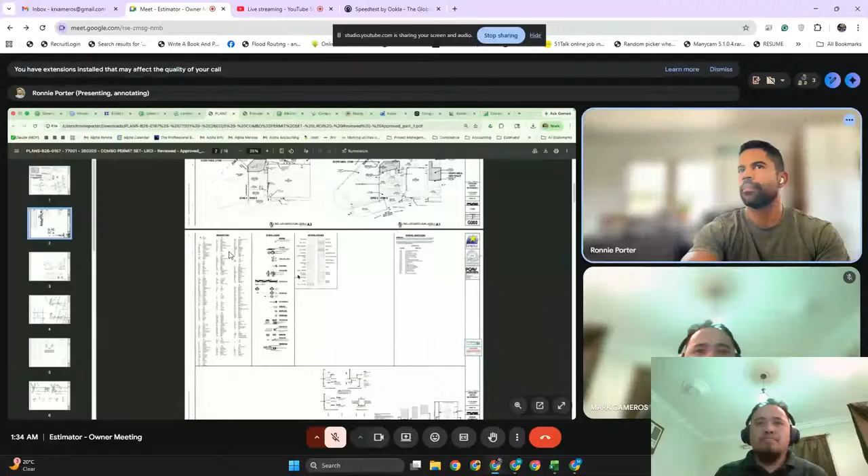Let me enter full screen here. Well, I haven't had this issue before. Something's going on where I can't see the plans. But obviously, wherever you downloaded it, like where did we download it? Right here. We can just open it up on a PDF viewer and see what the plans are. I just want to get a little familiar with it. Okay. So you'll want to review the plans.

And how do you feel about looking at plans and your understanding of what plans look like? I'm good with it. Yeah. Actually, you feel confident in it? Like, I've been dealing with those mostly my entire career. Been reading and then implementing them on site, and doing the estimates just to make sure we would not do some overruns for the project cost.

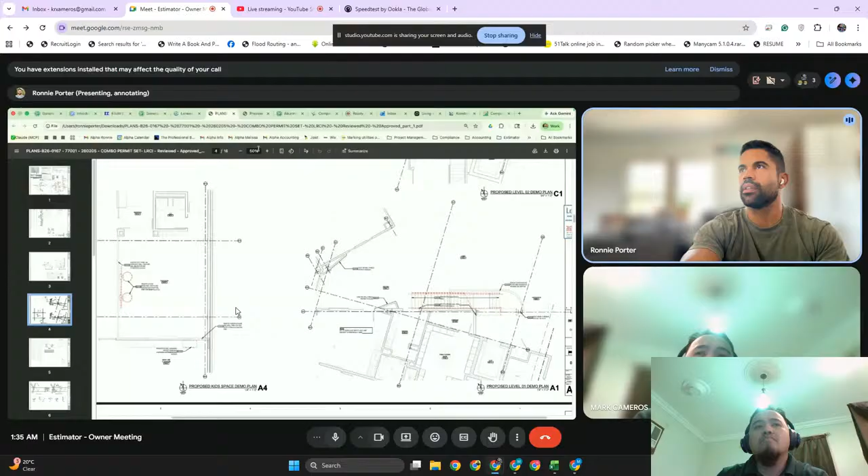Okay. Well, good. Because as I'm looking at it, it looks like there's stairs here. It looks like everything in red, which I can't read this stuff. It would take some time, right? Can you send that on my email so that I could download it and let's try to look at it together? I think mine would be better. Sure. Okay.

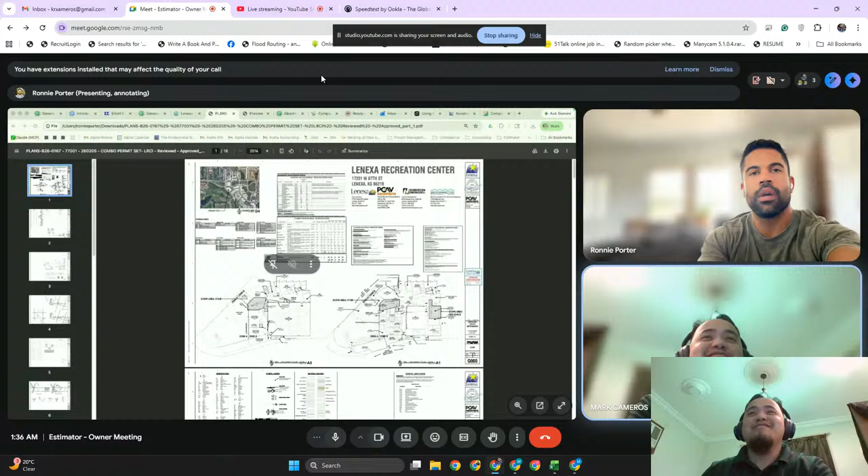Estimator. There we go. Next. I'll just send you everything. Yeah. Okay. Still haven't got the invite for Construct IQ. The invite for what? Oh, for Construct IQ. Okay. Hold on. Maybe you can just log in to the website. Yeah. Can you send it over in chat? Yeah. Because the

How many screens have you got? I've got one for now because I still haven't set it up. I do have three monitors. Two. I bought one in Temu. Actually, I still didn't set up this stuff. Yeah. Sure. Nice. I was just kind of expecting an onboarding estimator.

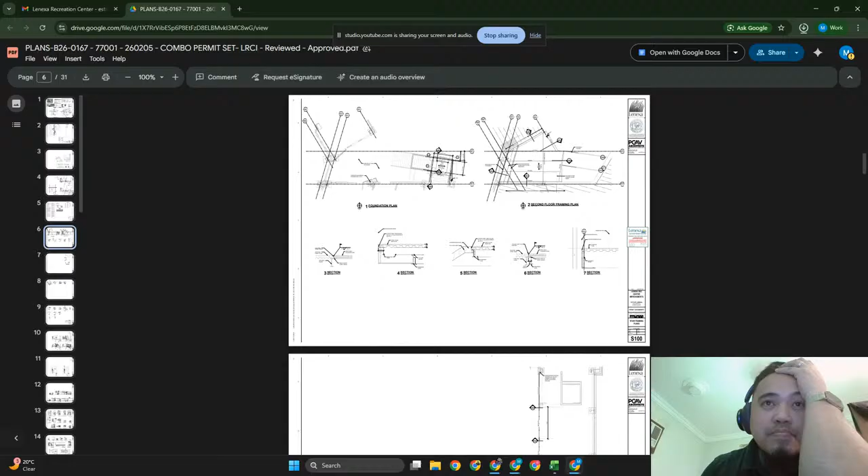So if you see my screen, is it right here? Do you have this option? Yeah, I did. Okay, so you did that. Well, let me see if I set you up the right way. Looks right. Oh, nope, I didn't do it. Your estimate's not estimator. That's the problem. Voila. Already exists. Oh no. Might have to reach out to him. Or maybe can you delete your account real quick with Construct IQ? Did it create you a new account? What does it say now? Well, it's saying that when I try to add estimates at Alpha Construction KC, the user with this email already exists.

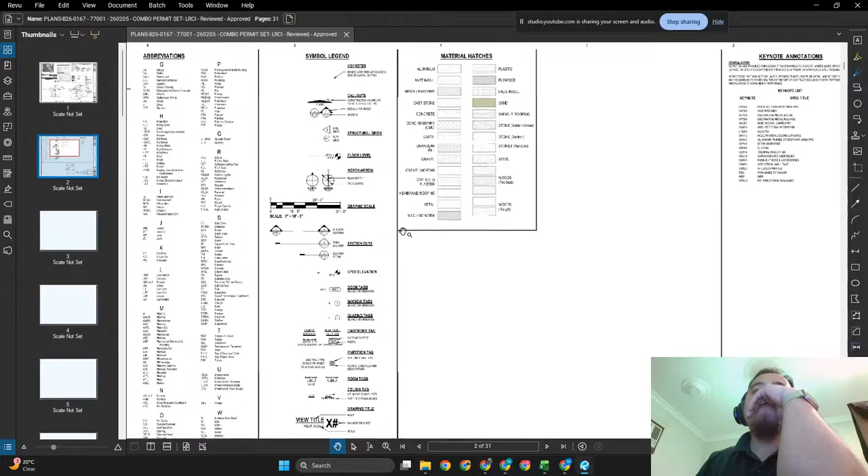The thing is, I cannot proceed with anything at all. Because it's asking me to. Hmm. This is strange. Let me delete and then I will recreate one. I don't think that's the issue. It would still be the same because the name is already registered. So perhaps we should call support. Yeah, you got it. Okay. All right. I'll work on that during our break. But let's go back to this.

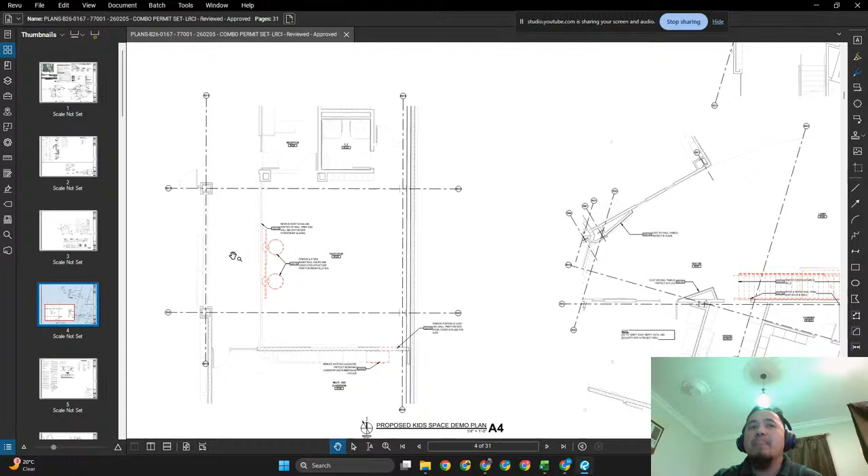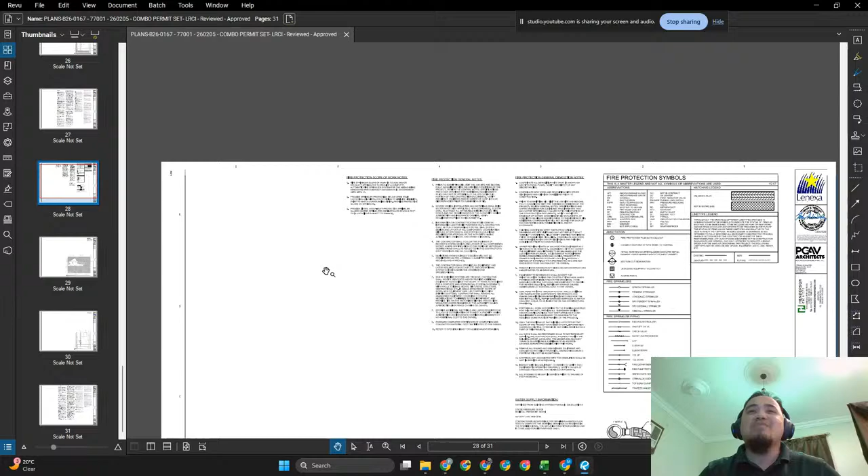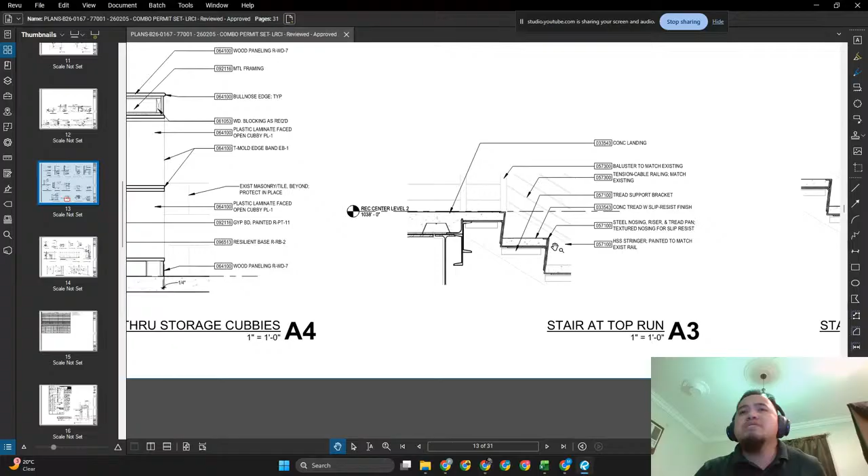It's kind of odd because the stairs is not literally concrete. No, they're metal stairs that you fill with concrete. Yeah. So that stair is a different one. Yeah, but for the foundation, let me check with the plans.

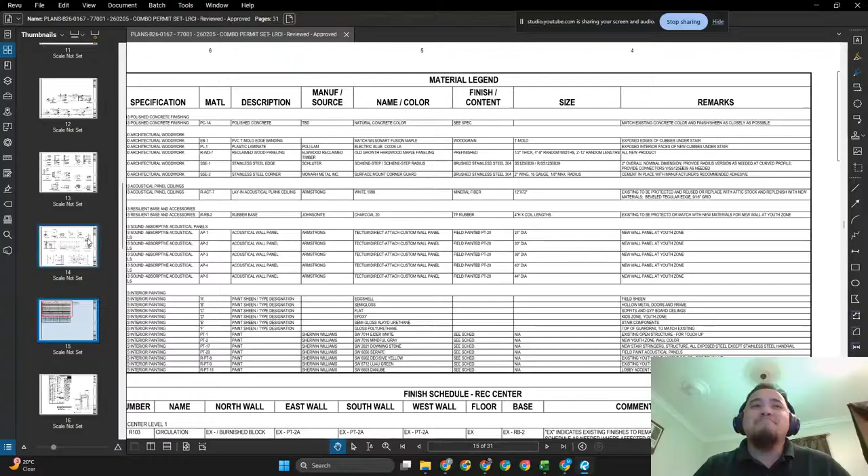Yeah, it's also right that it does not have any vapor barrier. So, amazing. Yeah, so plans are often not filled with all of the right stuff, so we would just have to put in assumptions. So there's an interior slab on grade on page 5, but it doesn't say how many square feet. I bet all of that gets the vapor barrier.

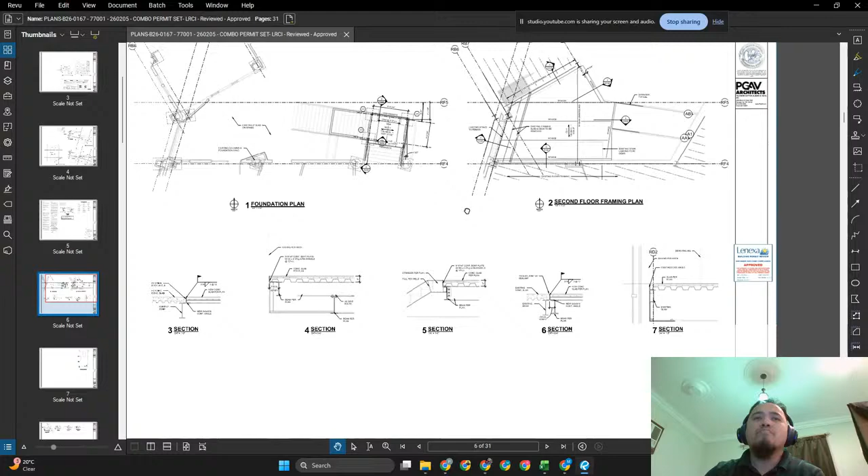Are you seeing the amount of the slab on grade for interior? Interior. Yeah, the interior slab on grade. I guess I can look too. Page 5. That's not page 5.

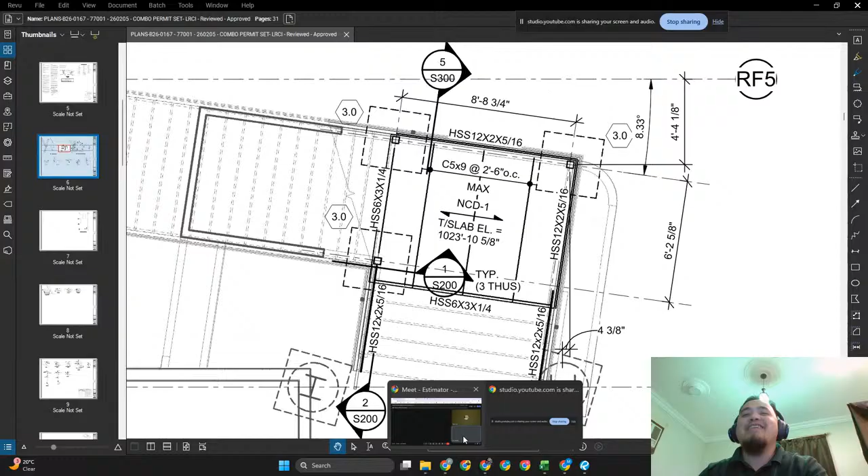Well, the slab that I have for here is the landing. How do you call this part of the stairs? Can I share my screen? The top landing? Yeah, you could. I think you're talking about the landing, right? Yeah, it's this, that one. Okay. And that's only this part, 6.2 and then 8 foot 8 and 3/4 inches wide. So it's not very big, but that looks like a suspended slab.

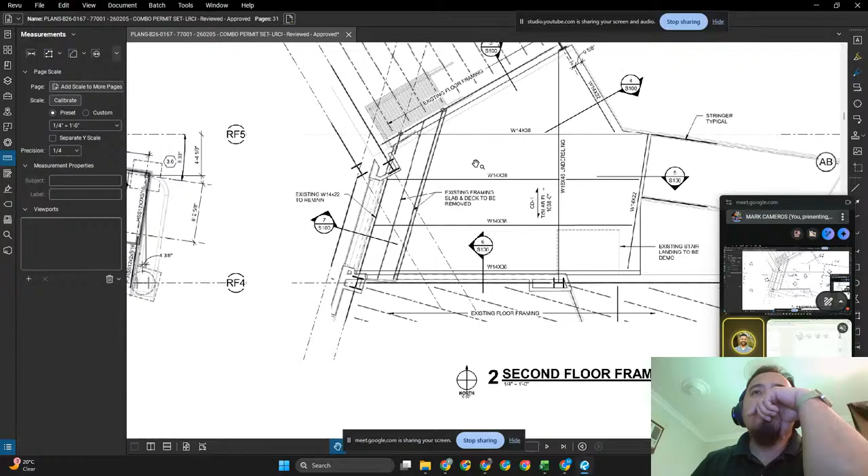You didn't see a slab on grade on the floor, like on the bottom level? Yeah, nothing at all. Well, there has to be, because these details show slab edge, a footing here. So it's gotta be here somewhere.

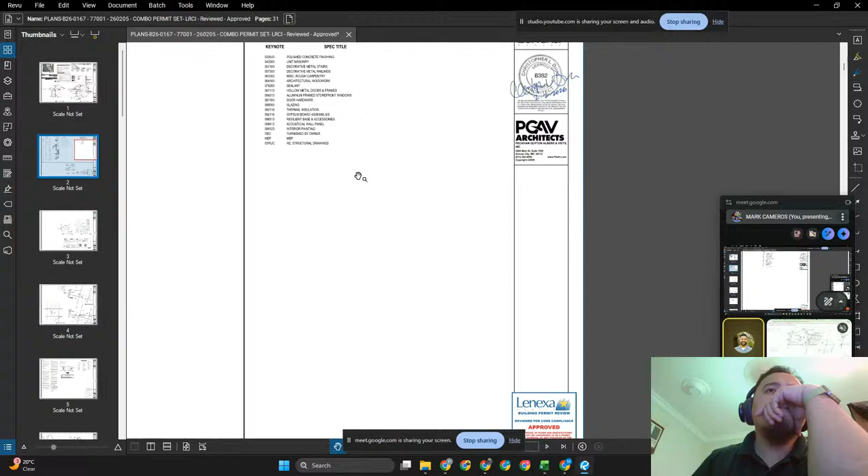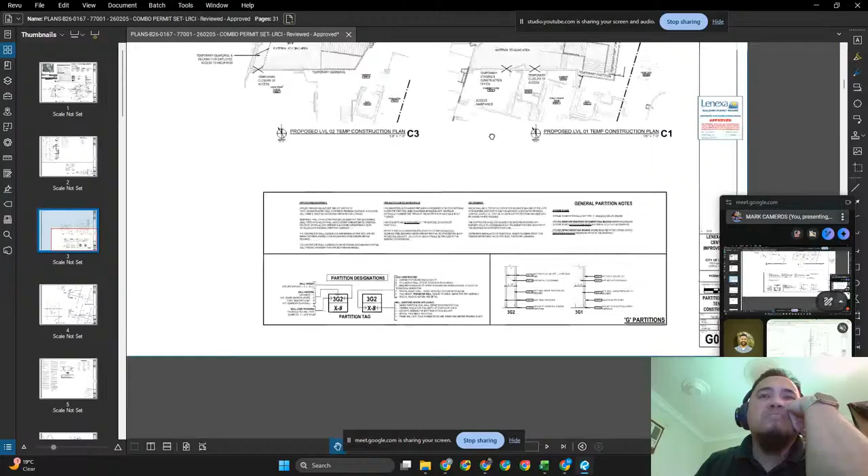Yeah, here's a new upper landing. And then there's the landing for the stairs. All these stairs get concrete. I'm just looking for the bottom floor. It's not so clear. What I basically had to do with this one is to look into the construction book of this. So this is just renovation, this part.

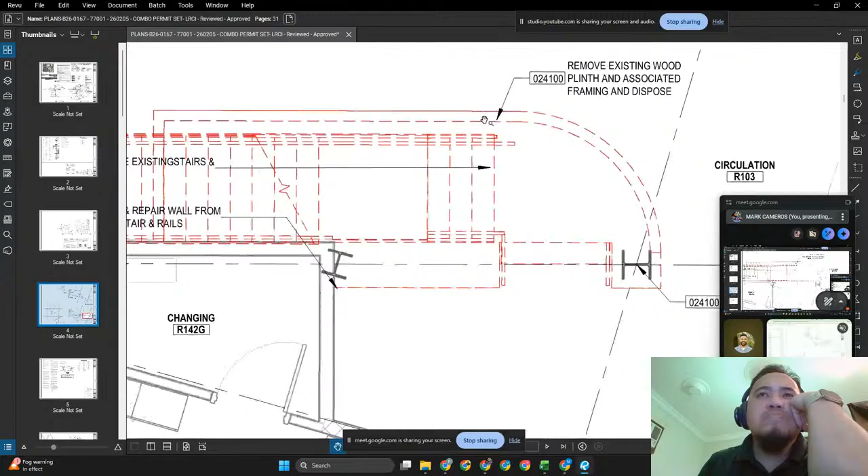Mm-hmm. Partition plan. Temporary construction. This is demo. Blueprint. Okay, it's in two different parts of the building. I see. So it's a fairly basic job, it's just hard to navigate exactly what is where. I can't seem to find the slab on grade layout. Neither am I.

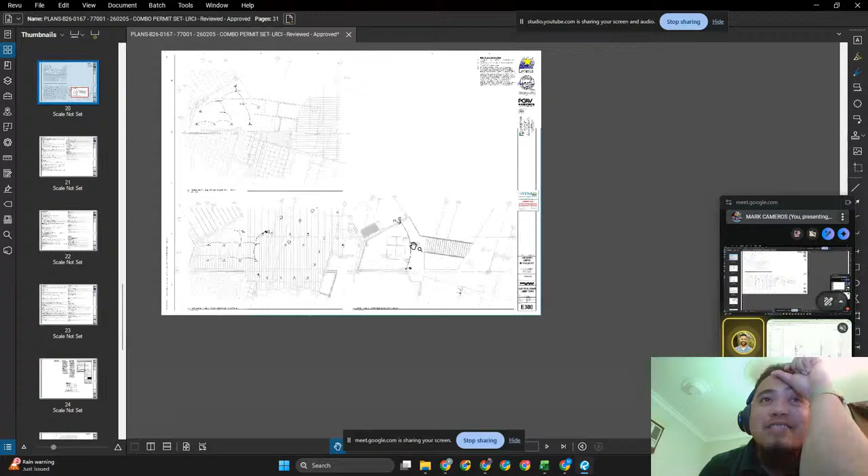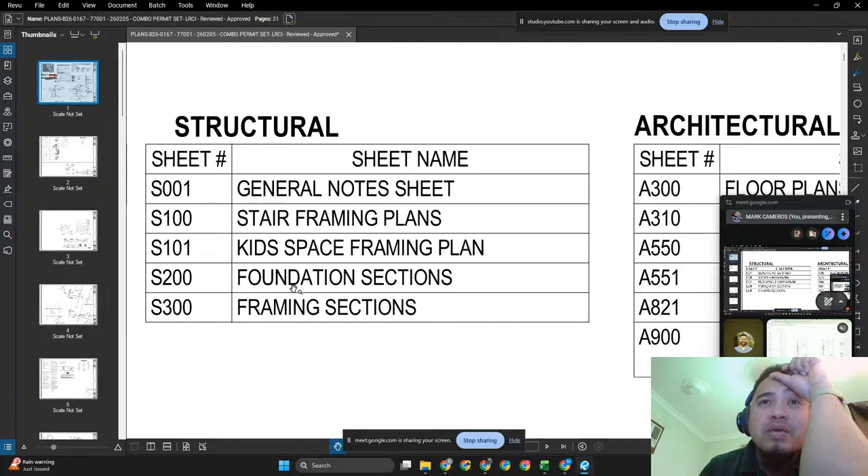I found the stairs and I think I understand the stairs, but in the structural, I don't think there is a sheet just for the slab. So for the structural, you only have general notes, stair framing, kid space framing, foundation sections, and framing sections. Nothing more. I saw framing, but I didn't see the slab on grade. So what would you do?

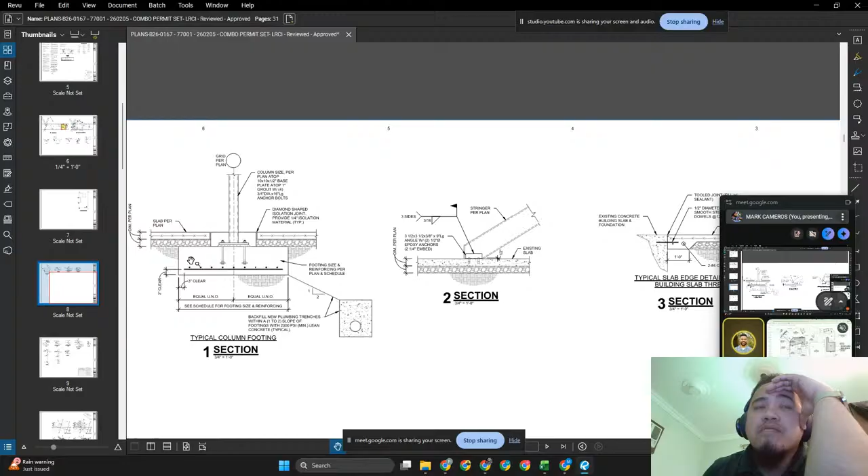I mean, here on the first page, it does give the room, the youth gym exercise, the kids space, as 853 square feet. And it looks to be on the bottom level. And then in the other section is the staircase. So what would you do in a scenario like this where it's not very clear?

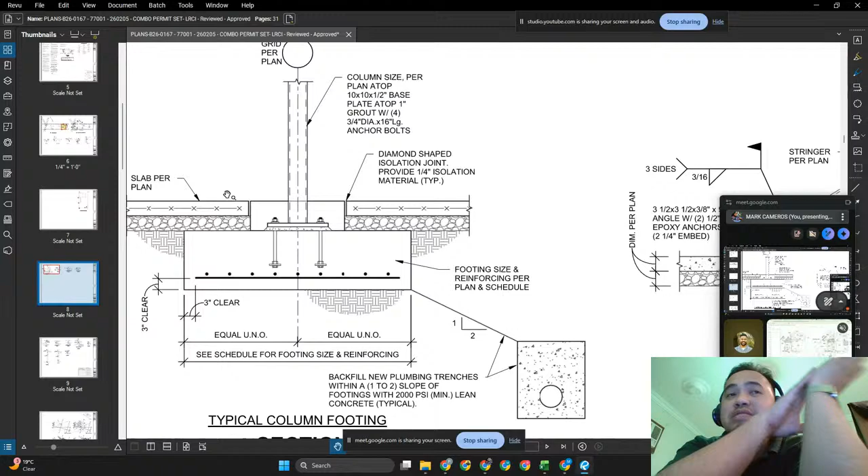I would write an email about this to clarify. If I cannot see it, I basically would have to verify it from you first before I would send an email to the client, because we could not rely 100% on AI, and I have to confirm it from your side if we would go for sending an email, because AI told us that they have these details and we cannot find it. Mm-hmm.

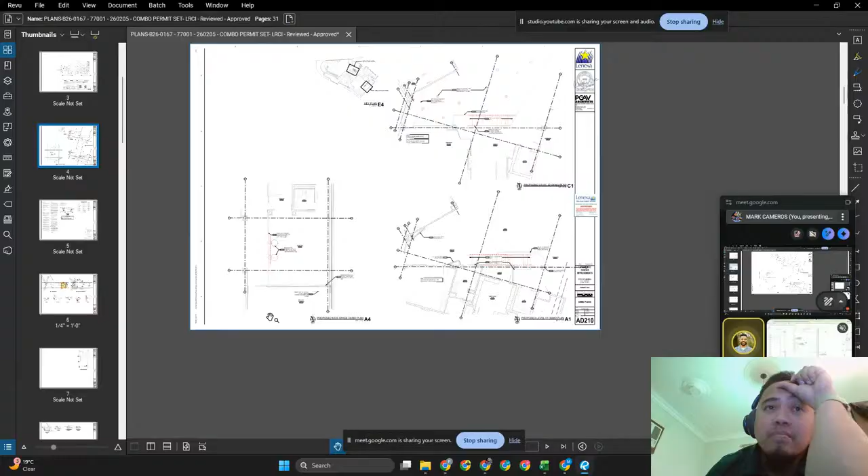In the demo plan, does it show that we're demoing a floor? I didn't look at the demo plan. What page is the demo plan on? Page 4. Okay, it just has it removing stairs. And then in the kids space, it has it removing basketball hoops and a chain link portion of the wall. So it seems to me like there is no slab on grade.

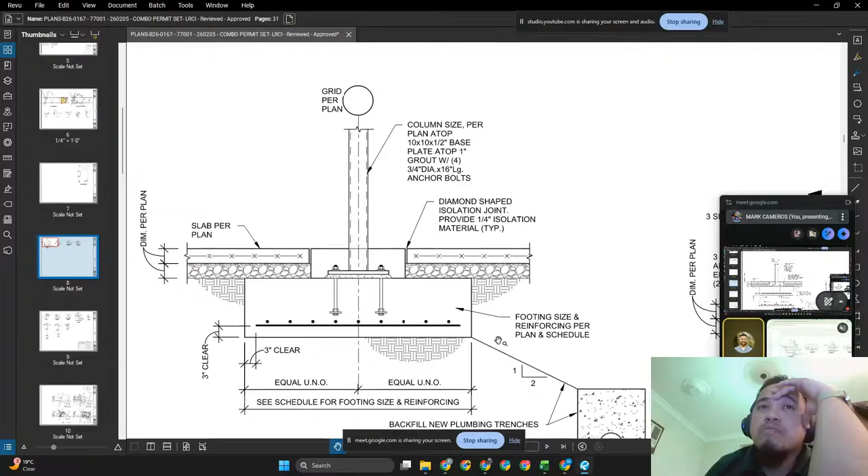But if we look for section eight, what page is this? S200. Here's the detail for the foundation, but it did not mention this. Yes, that's right. I wonder if those column footings are the footings for the new staircase. I bet they are. And then maybe the slab is for the staircase as well. Maybe we demo that area to put in the new footings and a slab, and the kids area doesn't get any new concrete.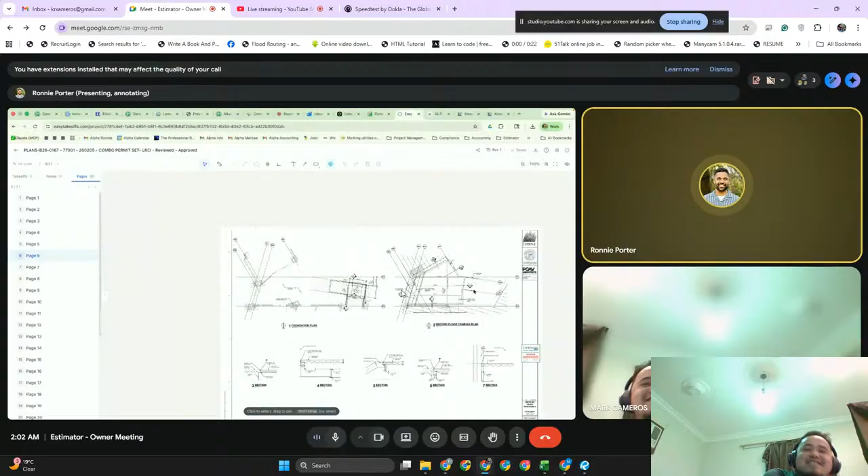This is a difficult one. So yeah, I think your response is right. We would just need to reach out to the GC because it's not clear where the slab is. The only thing that's clear is that we have a landing on the stairs and that we have metal stairs to fill with concrete and 3 footings. But where's the slab?

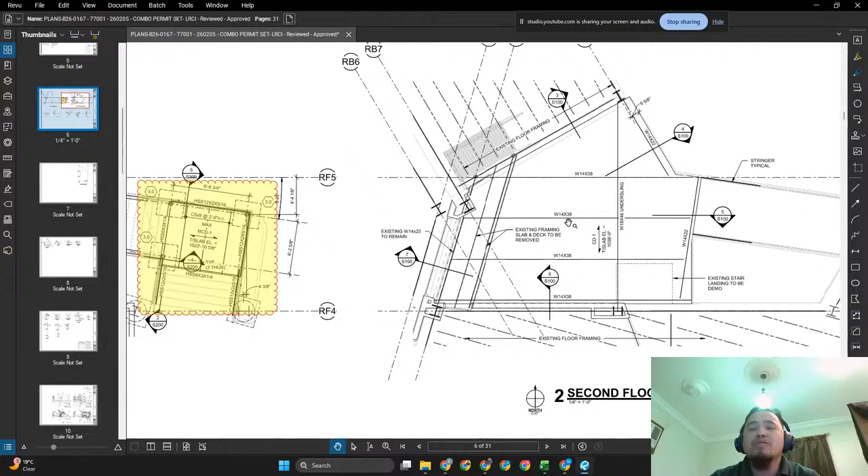So basically one of the responses that they are going to give to us is that the section is just the detail of whenever we are going to connect. But as indicated in the plan, there's literally no section that says pour concrete or new concrete. That's right. Wait, let me just, yeah. So can I explain this one to you a bit? Yeah. Let me stop sharing.

Yeah. So okay, I get it now why we are having a hard time. Sorry, I was nervous. Oh, if you figured it out earlier, that's great. I just kept on doing the search.

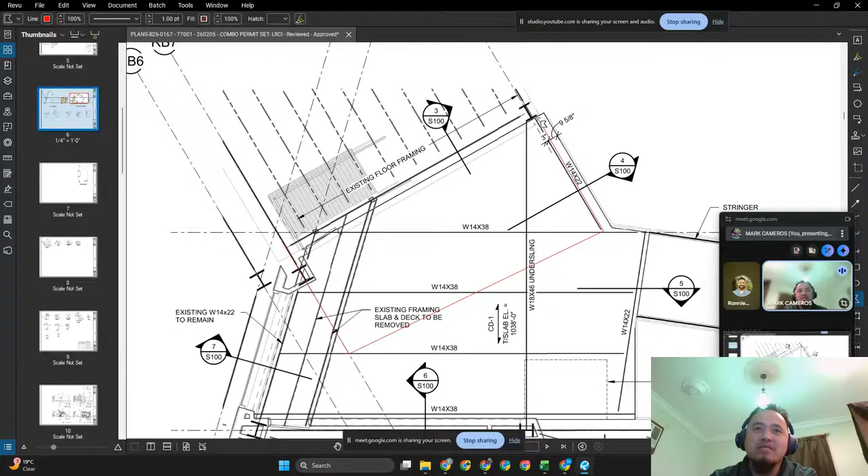So as we can see, we have these numbers, right? 3, 4, 5, 6, and 7. You can also see 3, 4, 5, 6, 7. So if this is the new existing concrete, as per plan, basically it's this part right here. Let me just check. Yeah, this. Am I right? Or this part. So we still have to, apart from this...

So we have this. This is the dimension of the steel frame. Mm-hmm. So we have to verify that. Well, I wonder if that is the new slab. I think it's bigger, actually, because, yeah, you're right on the details.

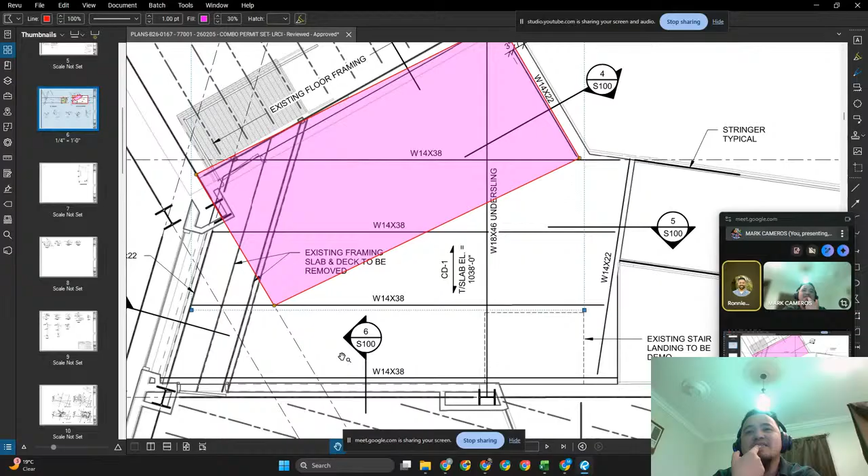We have 6 over there against that wall that's tying into new existing concrete. 7 terminates along the west side. 5 is where the stairs come up. You see number 5 detail? The stairs are coming up and landing there. So I actually think that whole area is new concrete. Okay, very good. So the slab is actually the suspended slab on the second floor. There's nothing down on the bottom except for the footings.

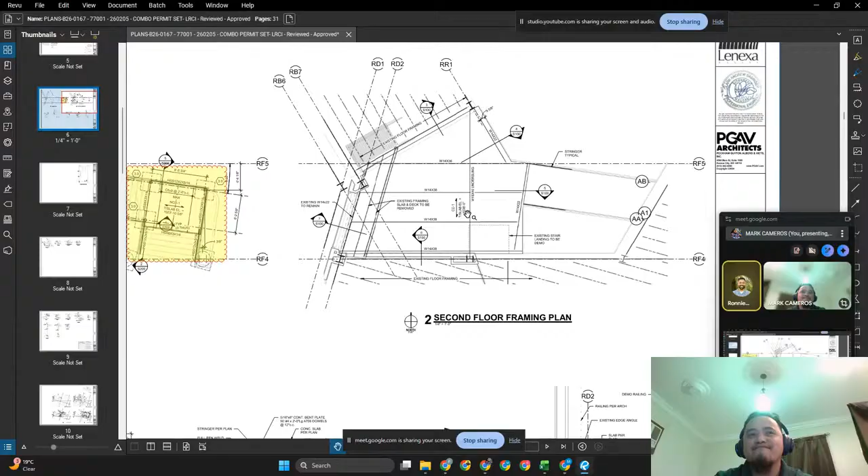Okay, very good. Well, I can understand why AI didn't pick it up, because it takes a lot of work to be able to see what you just saw. It did know there was a slab, but it had a hard time finding exactly where the slab is because it doesn't indicate it clearly here. So what I would do then to finish the estimate is do a quick takeoff on that whole landing there, and we'll give it to AI, and then it can finish its estimate.

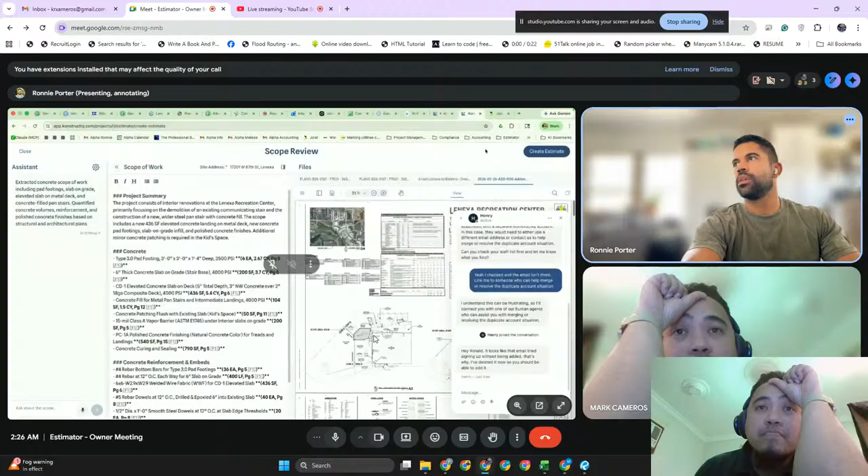Also, while we were off, I just asked them about deactivating the duplicate account. Okay, before you try to log in, I'm going to see if I can log you as a user.

I want you to be project administrator. Okay, it's saved. Why don't you try working on logging in? Let me know when you're logged in. I'm in. Okay, awesome. All right, that's good.

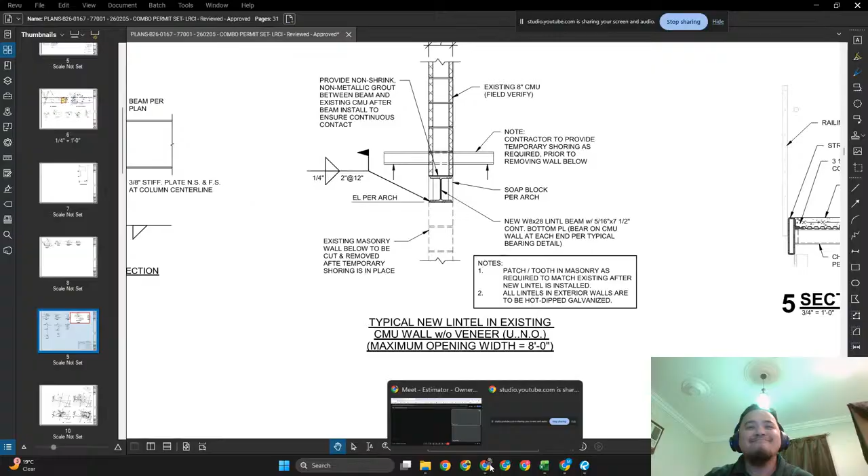Oh boy. Do you want to find those things while I work with this guy on the questions he's asking me? Which one? The number of stairs that need concrete. How many treads? Oh, wait a minute.

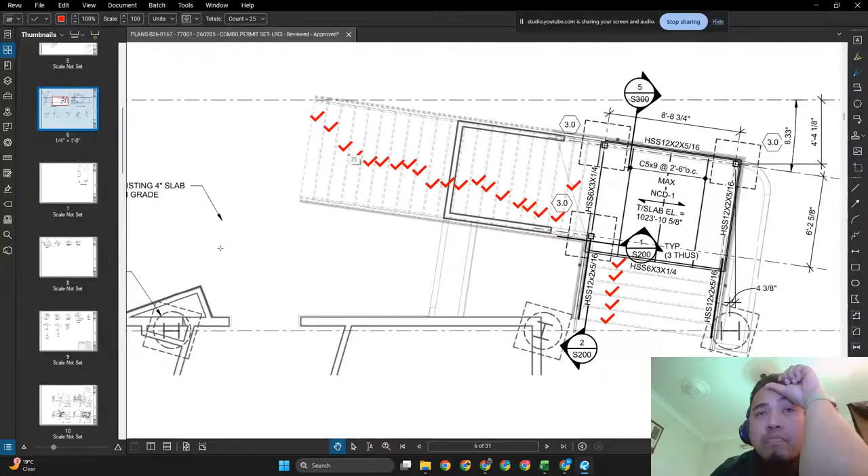Is it the number of flights? Yeah, so it's actually here. I'll show you the D. What it's asking for is the concrete filled metal pan stairs, the number of flights, how wide it is, the total risers or treads, and whether the metal pans are included. We're not going to install the metal pans. We're just going to pour the concrete. All right.

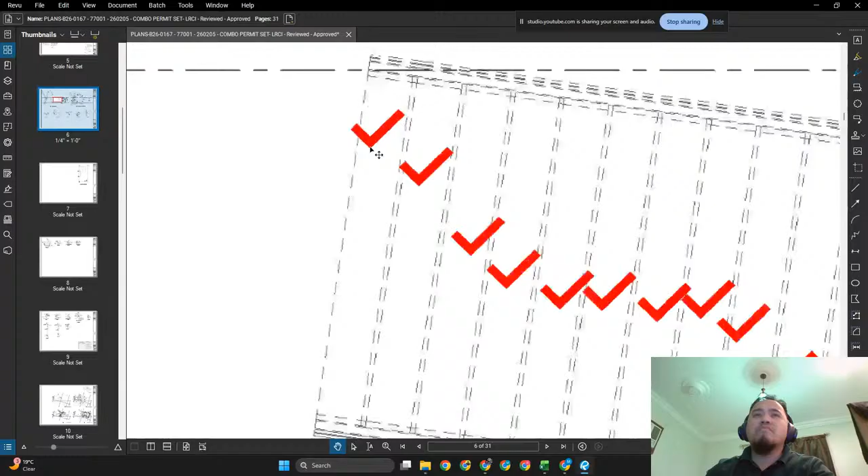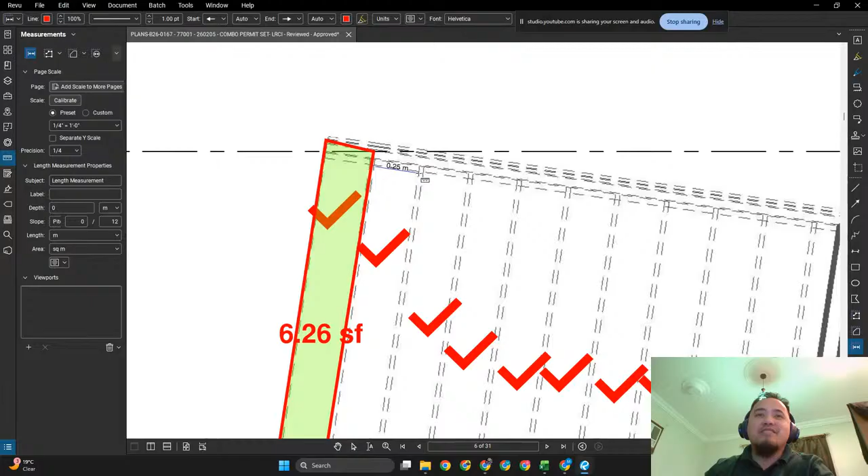The number of flights is 25, and what's that? Is it 6 feet wide? Oh, wait. Sorry. All good. I thought I got the, it's 25 mil, and 25 mil is 0.8 feet. No. Is your scale right? Yeah.

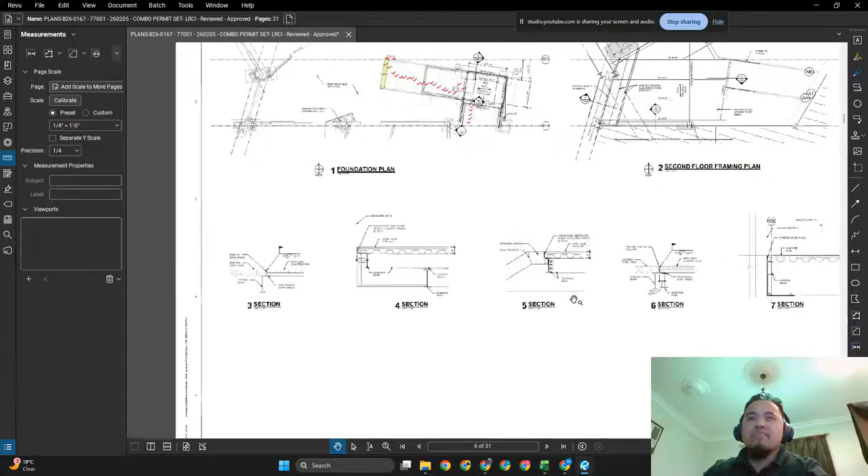We can just go to the landing. Yeah. Section details for the landing, or even the. Okay, so on EasyTakeoff, I'll just go and use this here, and I'll just do a linear foot. Let's see. I'll just choose one. Here to here. Yeah, something like 6'8". Hold on. Yeah, so let's use that. Where is it?

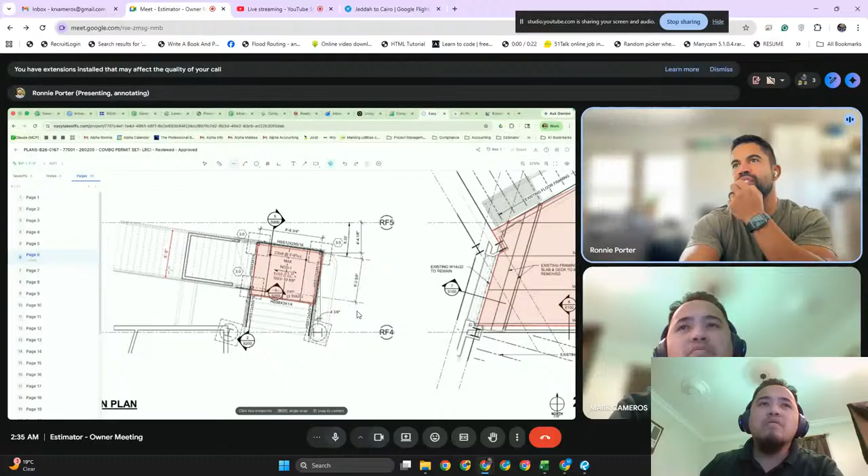Well, I just went in EasyTakeoff, and I just measured one of these, the width of the treads. So I'll use that 6 foot 8 inches width. Okay. So then what do we need to look for? Lean concrete for, we don't need backfilling plumbing trenches. We're not doing any plumbing. None.

Reinforcement quantities, 12 inches, 6 inches slab on grade. Oh gosh. So we would basically need to answer, okay, 110 square feet. Dowels on the edge. How many linear feet get the dowels? So we're doweling into this number 3, right? Yeah.

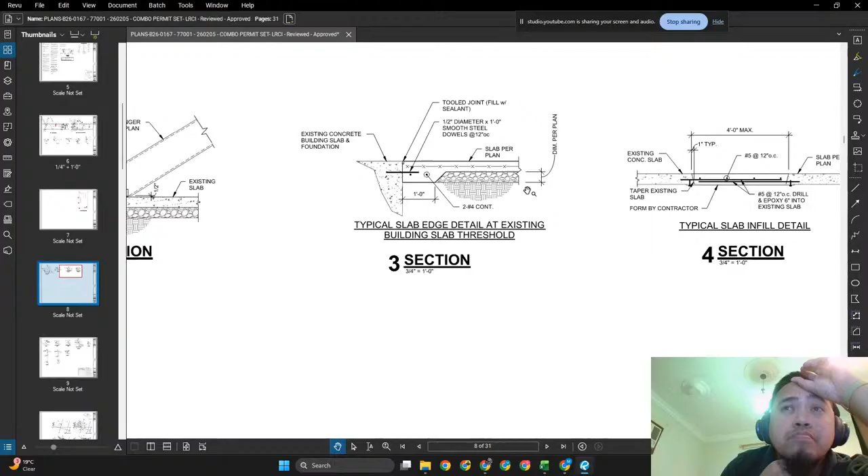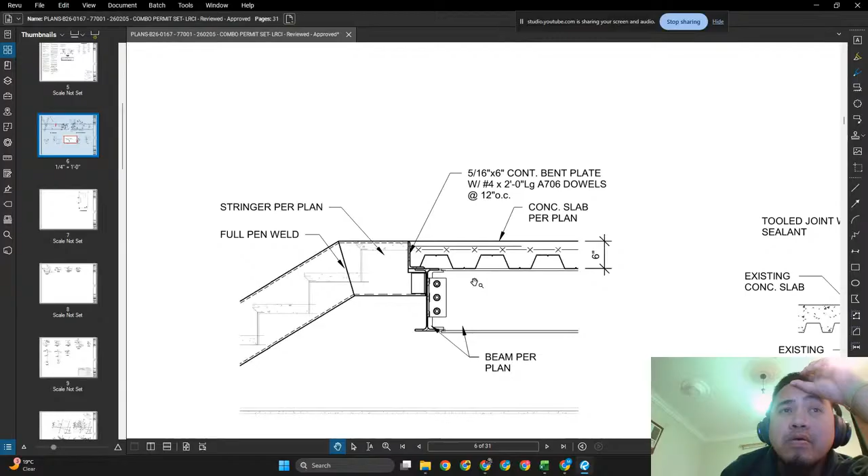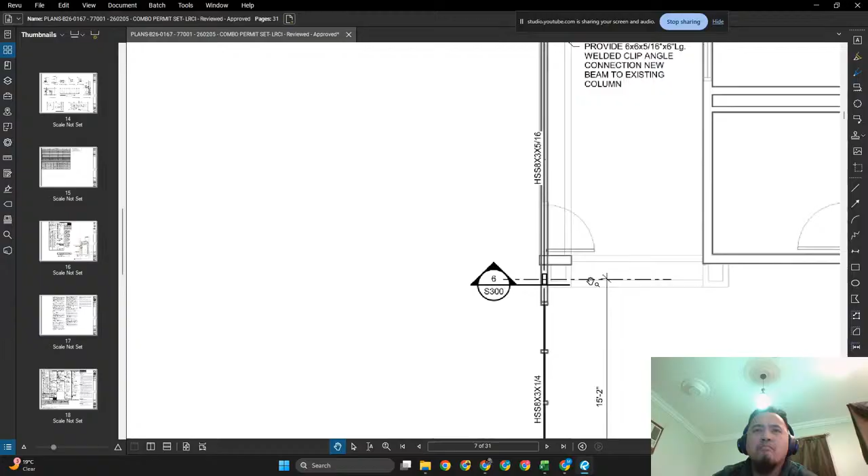So I'll do a linear foot here. Yeah, 6'10". And then what did I say? 4 and 5 sections. Okay, so 6'10", 17, 18, 19 feet. Oh, I hit enter instead of copy and paste. Actually duplicates. Number 4. There's no number 5. None.

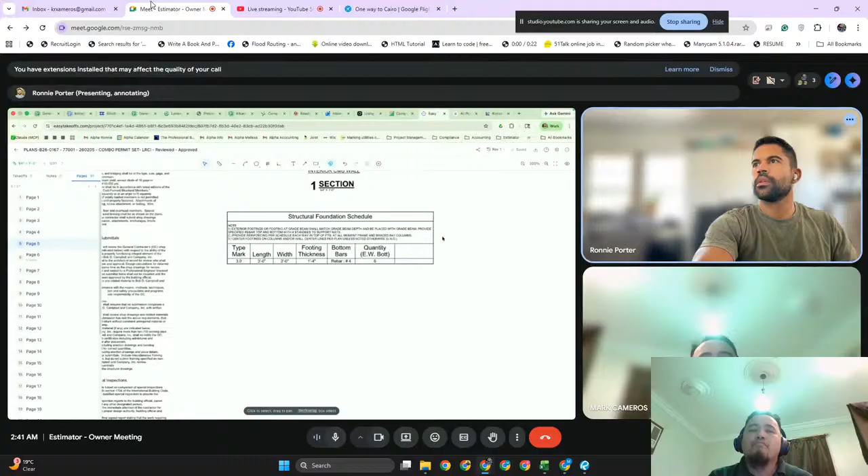You can see the exercise that we're doing. Control joint, linear feet. The only control joints I would see are at the footings. There's 3 footings. Is there a schedule here? I think the schedule is on a different page, right? Footing schedule here. Okay. And then the 3 foot by 3 foot. Yeah. Okay, so for control joints, 3, 6, 9, 12 times 3 is 36 linear feet.

Right. I don't like this little space that I have to type. It's not a whole lot of room. 10 bags for the non-shrink grout. I'm just estimating. Oh gosh, that's why I don't like it. Too small. Can I make it bigger? Can't make it bigger.

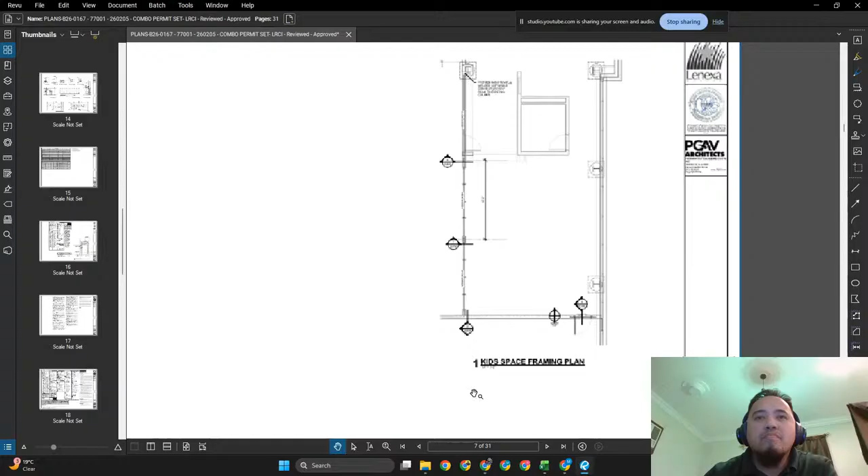It's kids space. I think it's 8. Oh, you're looking at the demo. Yeah. It says remove existing chain link portion of the wall and then prepare the CMU wall for new storefront glazing. Remove existing casework. Remove portion of existing CMU wall.

Oh, okay. So if we're going to remove the CMU wall, we'll probably have to do a floor. So it's really not that much. Probably 3 feet, I would assume. 3 foot 3 inches. I'm just gonna say like 2 square feet. I'll do 3 square feet just to be a little extra.

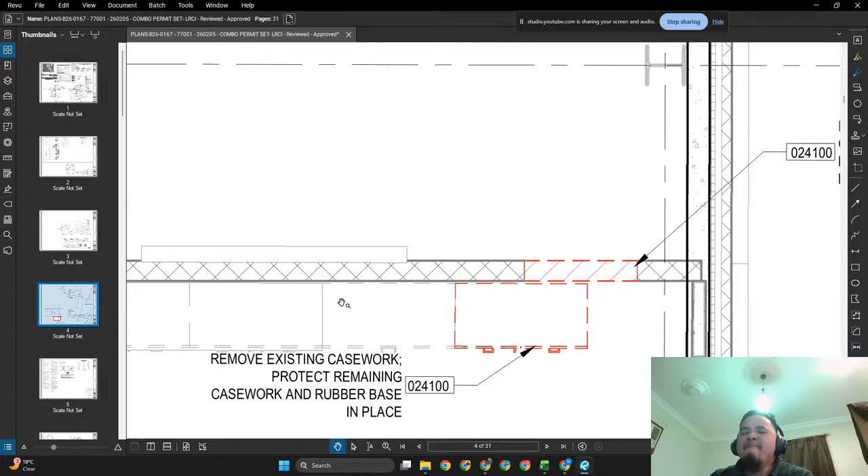Please confirm so I don't have to assume the suspended slab on deck perimeter edge length requiring edge forms. No. No forming because they're already going to have the metal angle installed. Okay. And then notes applied from your instructions. Yep, don't include cost on that. Nothing there. Metal pan stairs. Install and finish the concrete only. We're not installing that. Okay, so we've answered all of its questions. Now I believe it's going to produce an estimate for us.

But don't hold your breath or you might die. No. It's small, but it's tricky. Yeah, I agree with you. That's a good way of saying it. And you say that you want the estimate for 20 minutes. Yeah.

Well, yeah, this one definitely is tricky. It is a small job, not very much square footage, but yeah, it is tricky. You're right. But it's not so much work that we can't do it. We just have to know what we're doing. Yeah.

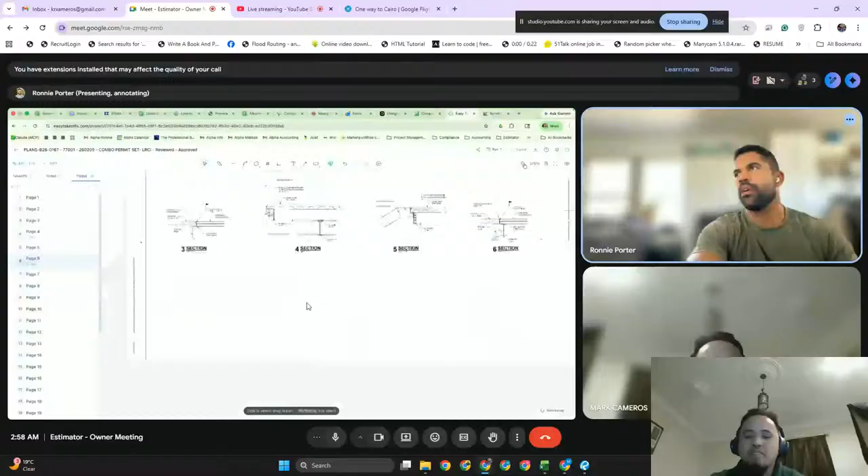Does it say anywhere on the plans, maybe when you were looking you could tell, does it say anywhere that this is a six inch thick slab? What we could do is go to the section. Oh, I think it all calls per plan. Oh, there it is. 6 inch. Yeah. 6 inch. Oh, very good. Okay. All right. So thickness here. 300. 6. So it's all 6 inches thick.

Concrete patch. Not very much. So I'm gonna let it know that we actually don't do stairs at 135. We do them at $165 per tread. These are my last two. And one thing.

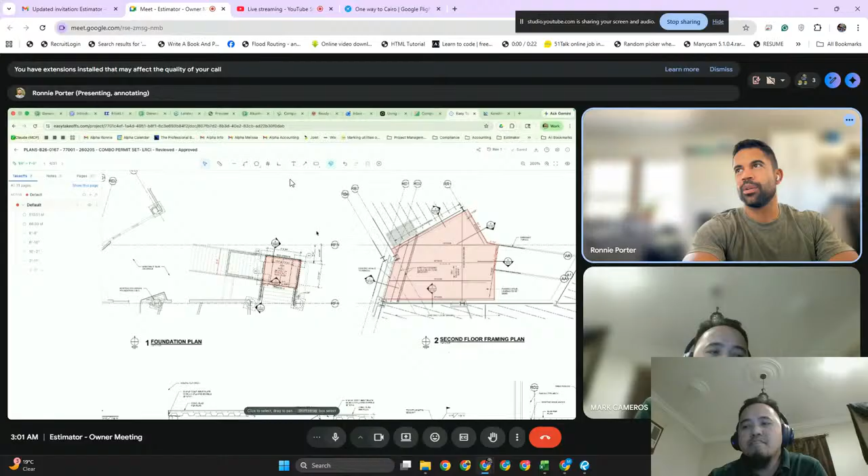I'm gonna tell it I don't see where we would have vapor barrier. It maybe had a note about it, but if these are suspended, maybe in the footing detail. What page was that on? Do you remember? Hmm. More. Go down. 9, 10. Yeah, that one. There you go.

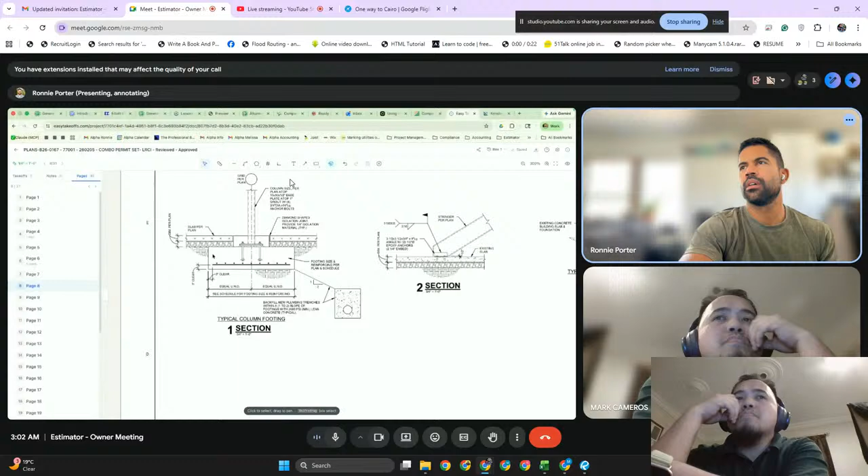Vapor barrier. I see isolation joints. Yeah, and that's all. Oh, it looks like we're gonna have to do a slab right here to cover our new footing. Yeah.

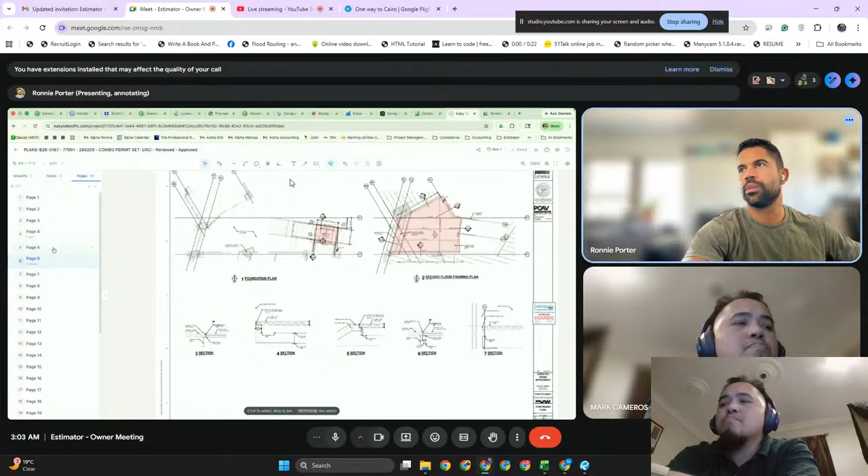Oh man. And then it's got this little thing. This is where it's coming up with the plumbing. Backfill new plumbing trenches within a 1 to 2 slope of footings with lean concrete. I'm not sure why we would need to do any of that. But yeah, it looks like we need to cut back the concrete, do our footing, and then fill it back, probably. There's a little bit of a consideration there. But still, as far as vapor barrier, I don't see where we would need to install vapor barrier. So I'm going to get rid of vapor barrier.

Okay, so this is, would it be with the stair? No, it wouldn't be with the stairs. No, it doesn't make sense. Okay. Concrete fill, slip resistant, stair treads at landings. Okay, so it's just a broom finish. $4.25 seems low because this is hard work. I'm done with this.

Reinforcement for the pad footing is included. Welded wire fabric for the deck. Rebar for the slab for the landing. Well, wait a minute. Do you see it's got welded wire fabric and it has rebar? That doesn't seem right. It doesn't have both, does it? Welded wire fabric for the deck and then also rebar. It does not mention about. Yeah.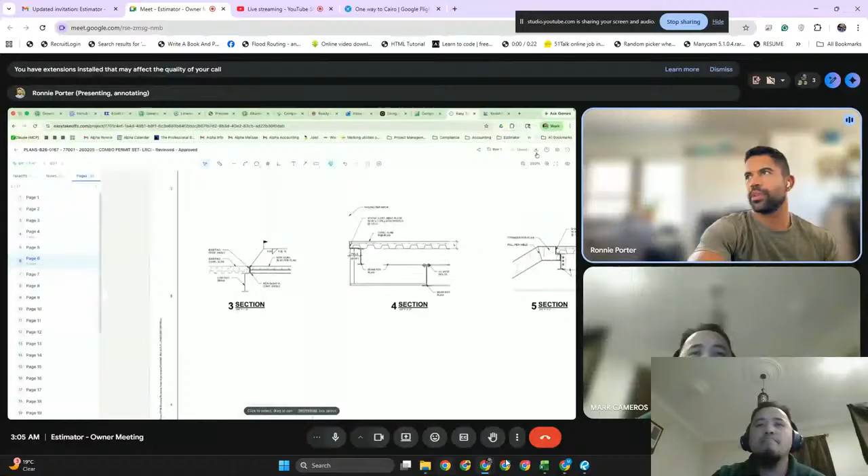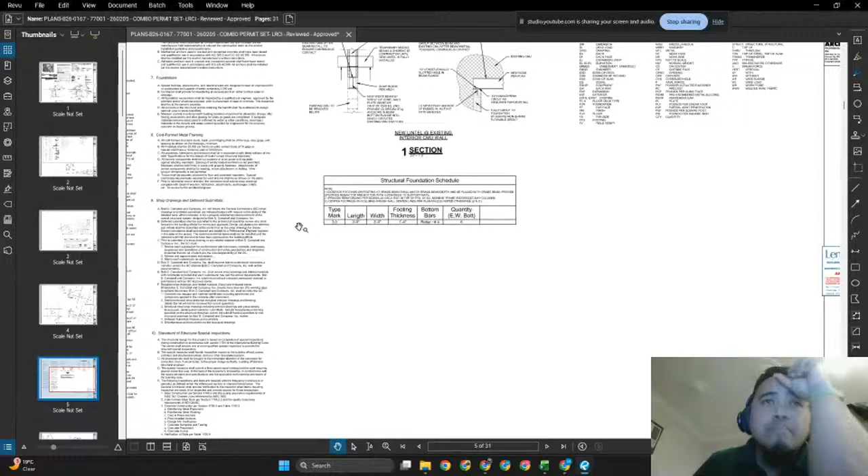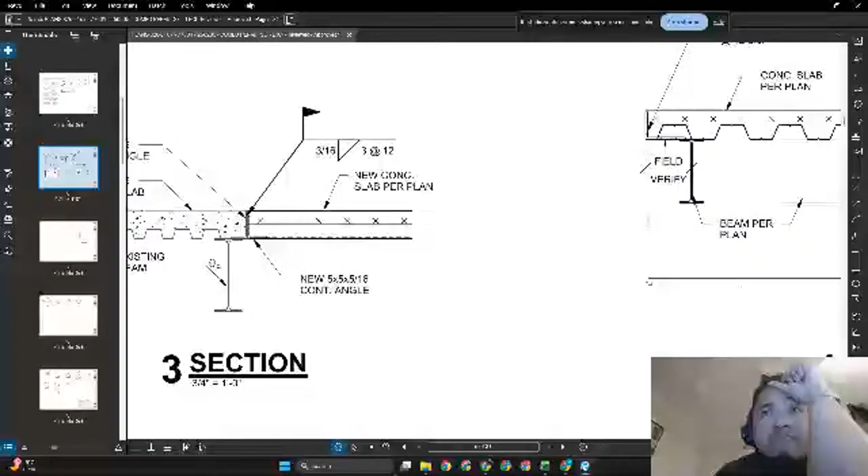It says new concrete slab per plan. Where's the detail for the slab? Page 2. Page 2. Wait. Let me check on my side. So far, at least I'm just looking at it. It always says slab per plan, but that's all it says. Yeah, same thing. Slab per plan.

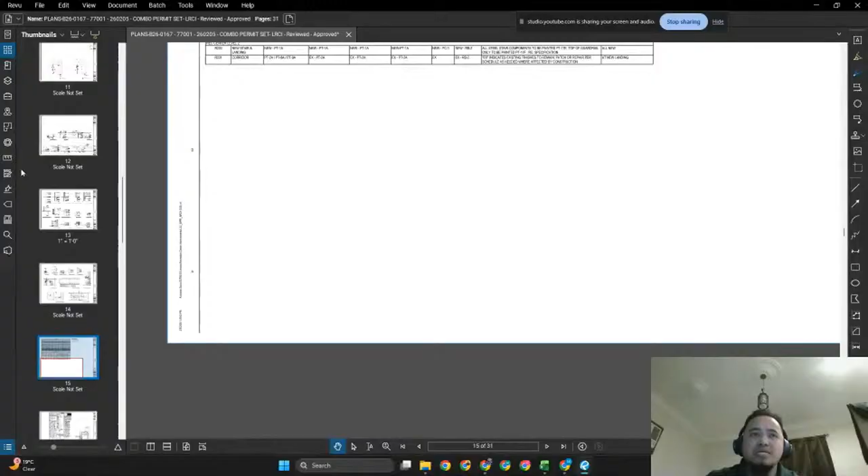Well, that's the problem. I don't really quite see what the welded wire fabric and rebar. I think the one with X in the line is the wire fabric, because if we are going to have it on a regular way, it's not the typical reinforcement, since this is steel deck. Mm-hmm. Yeah. Let's go with that. All right. 4x24 dowels. Yep.

Smooth dowels are usually okay. Continuous rebar. Slab edge threshold. This is just overlapping rebar, 19 feet that we're gonna drill and anchor in. Bolts at the column base plate. I don't think I have to preset those, so that's fine. 8 anchor bolts, $65 each. That should cover it. I don't know why it went down to 55. It should still be 65 per anchor bolt.

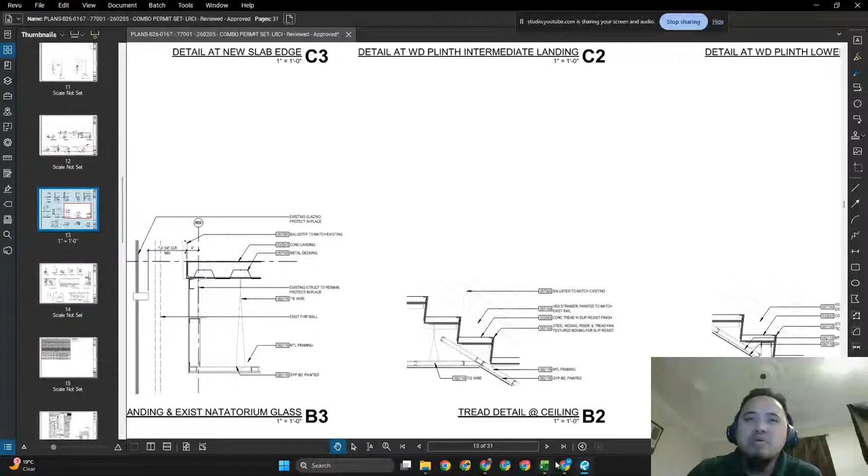Okay. There's not going to be any tooled control joints unless it called for; I would assume it would call for saw cut instead of tooled control joints. Are you familiar with the difference? Let me check. Which one? Whether we're going to saw cut joints on the slab or use a tooled joint. I imagine because it's interior, we're going to use a saw cut. So I don't know if maybe somewhere it specified that we were going to do tooled control joints. Let me check the notes in structural.

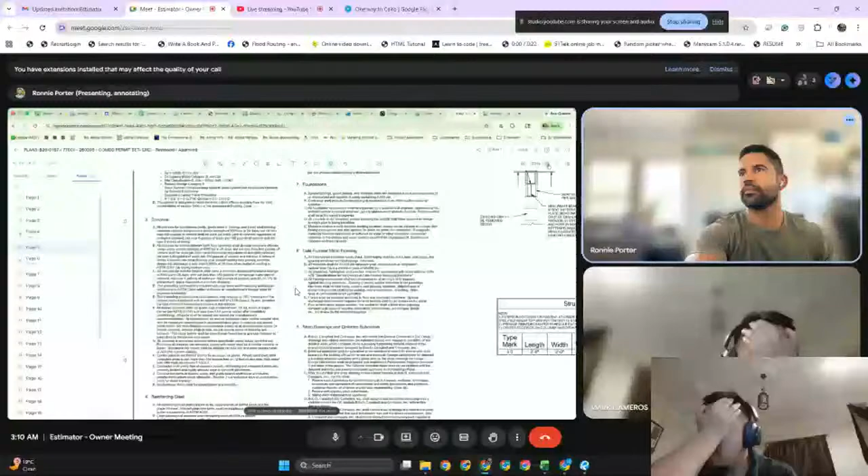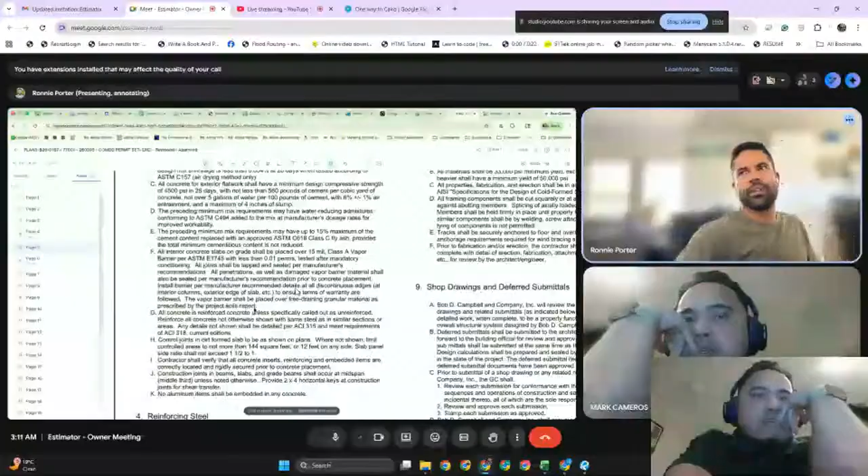Oh, looky here. It says all interior concrete slabs on grade shall be placed over 15 mil Class A vapor barrier. The vapor barrier should be placed over free draining granular material as prescribed by the project soils report. That doesn't make sense. There's no soils on. Maybe it's just the first floor, not the suspended. I think it's with the foundations. Yeah, I think you're right.

Okay. So still very minimal vapor barrier. I think I'm just going to do a contingency fund for those little things rather than a separate line item. I'm going to change it from tooled to sawed. Oh, here it says saw cut or tooled. It's going to be saw cut. So I'm going to get rid of the word tooled. We don't do polishing, so we would need to get a subcontractor, and so the cost for us to do that's going to be a lot more per square foot. That's probably not that much. Okay.

All right. So I'm going to add one more thing. How do you feel about it, first of all? I feel like I want to try something new. Yeah. You want to try something other than Construct IQ? Maybe we could have it tomorrow. But I record everything so that I could get back to it. Yeah. Oh, okay.

So for you, that's kind of the full cycle with construction. And like I said, whenever I have questions, I use Easy Takeoff to be able to look at the plans. It looks like you have one on yours. What do you use? It's Revu, Bluebeam Revu. Oh, okay. And you can keep using that if you like. It's just whatever allows you to do quantity takeoffs manually. But the hope is that Construct IQ does most of the work, and then you only have to do just a little bit. Gotcha.

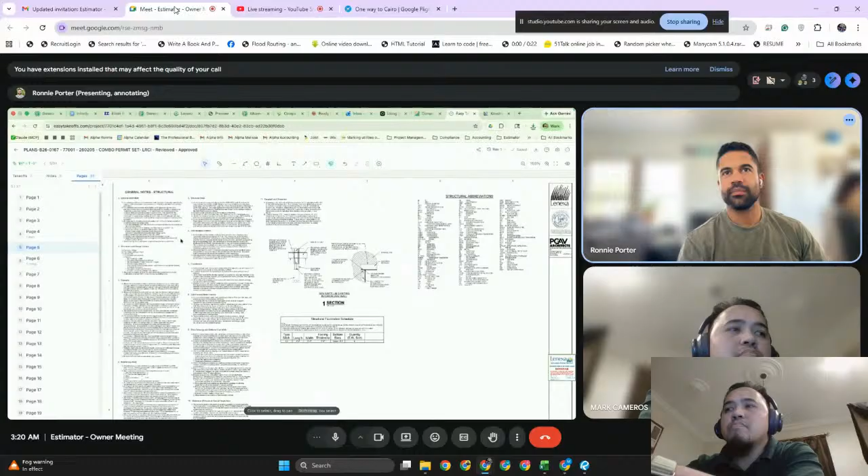Yeah, so that's pretty much how I would see it. Now the KPI that I have you at is like 20. So if you break that down for 4 hours a day, 1 every day, that's 20. So you have 4 hours basically to do 1, and that'll get you your 20. If you're really motivated, these jobs are really small, so it's really easy to do 2, then 2 per day is kind of the standard, and that'll give you 2 hours per estimate for the whole month to figure these out. So I think that's reasonable. And then of course, anything over 40, we'll talk about bonuses down the road. Really, I just want you to take a look at some of the plans that come into the estimates inbox.